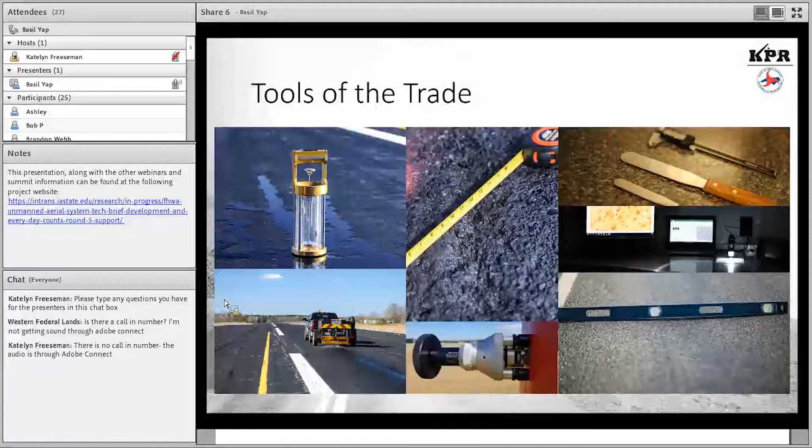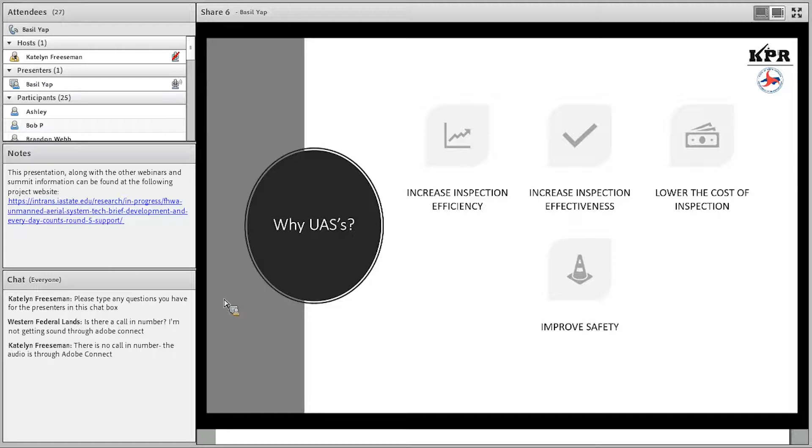So as highway professionals, we've got a lot of different tools. And all of these technologies require training and they require practice to implement, but each one of them enhances what we do, allows us to provide a better level of service, and also it usually helps us do things a little bit more efficiently. So something Katelyn touched on a little bit, why do we want UASs in our arsenal? Increase inspection efficiency, increase effectiveness, lower the cost, and one of the big ones we are seeing more and more is improving safety.

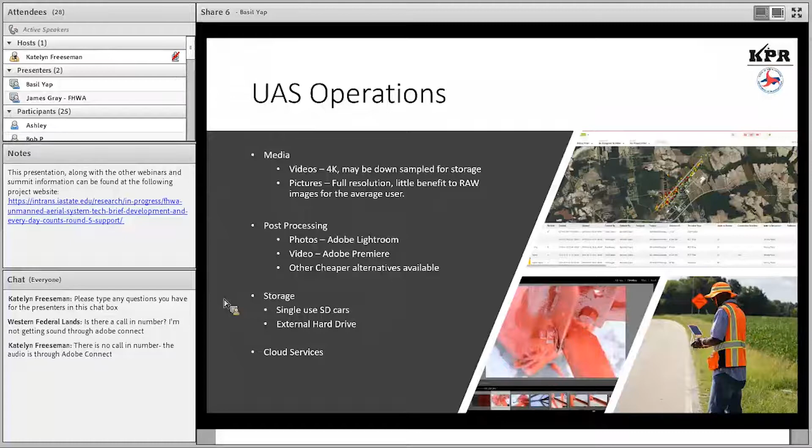For my team, and this is pretty common across North Carolina, we generally do operations in a two-man team. We have airband radios, we have all the VFR maps, and all the safety gear you'd have on a regular construction site. In terms of data, there's a lot of different things that we do. Most of the platforms we have 4K video capabilities, and they also do high-resolution photos. Honestly, there's really no good answer to which is better. Each inspection type, each inspector may prefer one or the other, and it's very good sometimes to be able to have both at your disposal.

So a couple of features that we look for, and this is an ever-changing field here. Sensor size, and that's the actual sensor of the UAV, not necessarily the megapixels. Obstacle avoidance. Wide-angle lenses are really good for those close-up inspections and getting perspective. Adjustable focal lengths. This is something that's becoming a little bit cheaper to find on UAVs, and this allows us to zoom in and see things in greater detail.

I've said battery time, battery life, battery time. I call it battery time because the size of the battery is irrelevant. It's how long the UAV will fly. And depending on your mission, you may need really extended flight times. A top-mounted camera, something we don't think about a lot. We need to be able to see up if we're underneath something. And then thermal cameras, which are coming down in price every day, can be quite useful for a lot of applications.

Just a quick note on the resolution versus sensor size, something that often gets overlooked. A sensor that is bigger with the same megapixels as a sensor that's smaller is likely more complex. It's going to have greater detail, greater definition. So if you're out shopping for a UAV, don't necessarily look at 20 megapixels versus 22 megapixels. Look at the details of the sensor, and you may find that you'll find more usable data.

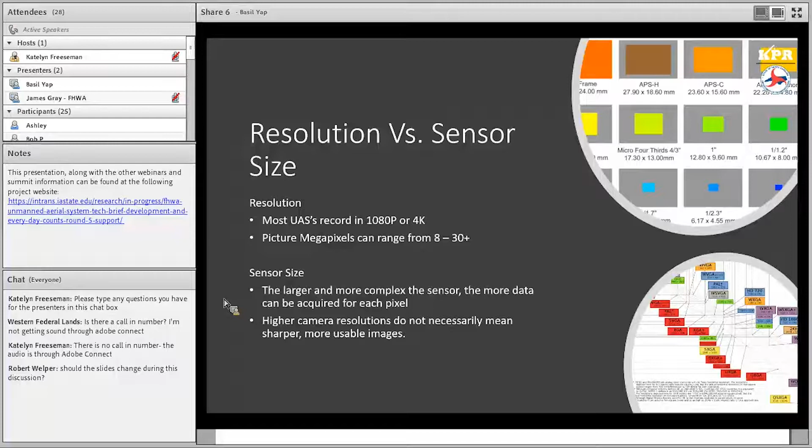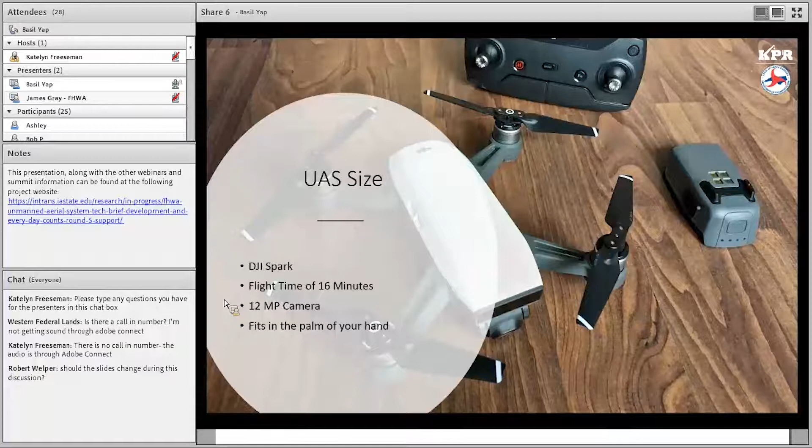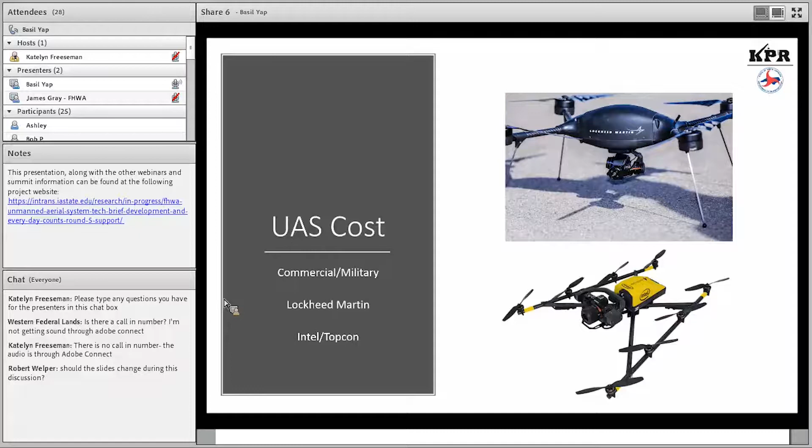Size here, this is a DJI Spark. Fits in the palm of your hand. It's about 400 bucks. This is probably the low end of what I see somebody trying to do anything with. The high end is things like the Lockheed Martin. Current price, I'm not sure. Last time I was quoted around 40,000 bucks. The Intel Topcon model there with the camera, probably going to look at about 25 grand. And these are with base model sensors. This isn't thermal or anything special.

Most of the folks that I run into in North Carolina doing this work have a UAV within the $1,000 to $10,000 range. A couple of popular ones there, the Yuneec and the DJI Inspire. A couple of other smaller popular ones are the DJI Phantom and the Mavic. And less popular, but definitely worth a mention, the Parrot and Autel UAVs. Parrot is one of the few companies that is not a Chinese-based company. For some folks, that makes a big deal. Autel is a Chinese-based parent company, but they are based out of Washington State for their U.S. operations.

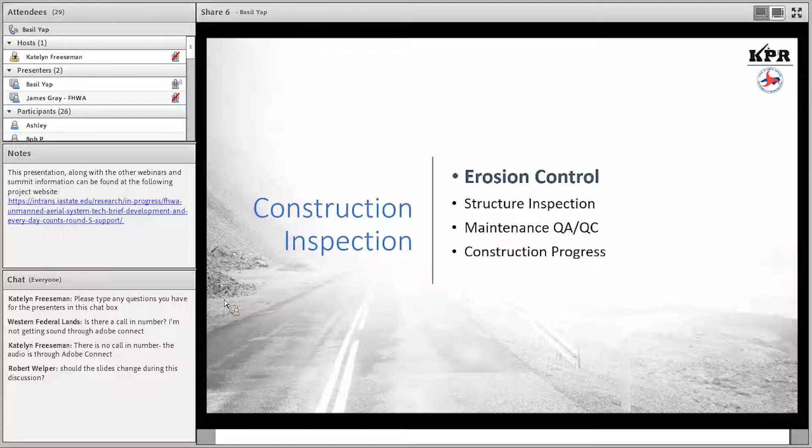We'll jump right in here to construction inspection. I'll let Basil take over. So we have it kind of split into 4 different sections here that we'll go through. And the first thing we'll look at is how we can use drones for erosion control. It's one of the use cases that we currently have NCDOT employees using drones to help monitor our erosion control measures on job sites, or really any other stormwater ponds that we have.

And it's important. This is really a kind of a use case that if you're just getting started using a drone within your civil engineering consulting firm or your Department of Transportation, with some off the shelf drones as well as some straightforward training, you could dive in and start using this.

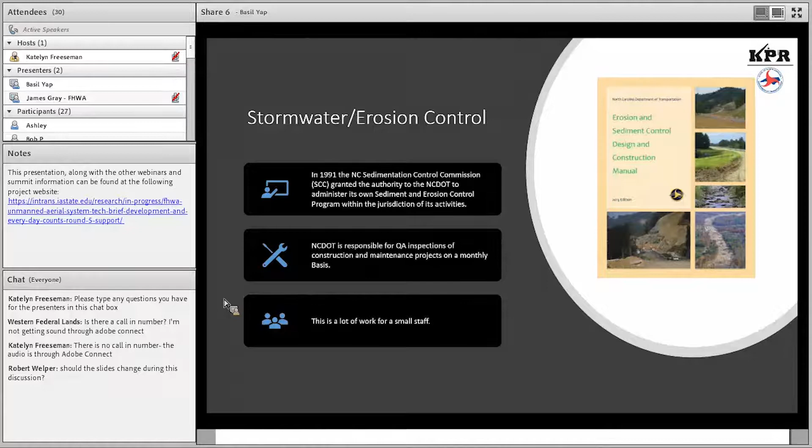So relatively uncomplicated. But we do obviously take stormwater and erosion control very seriously here in the state. Before this role, I worked in a residence office and oversaw a lot of construction sites. And certainly each day we're making sure that the erosion control measures were holding up as they were designed, especially during the afternoon showers that we often get here in North Carolina and the southeastern part of the state.

So the erosion control measures are permitted by the NCDOT, and so we just want to make sure that a contractor who has put those in place has properly placed them, and then we can document them. And they're of course maintained over the life of the project, which could go anywhere from one summer to multiple years. And so within North Carolina DOT, our roadside environmental office is going to be looking at those, as well as our division construction office.

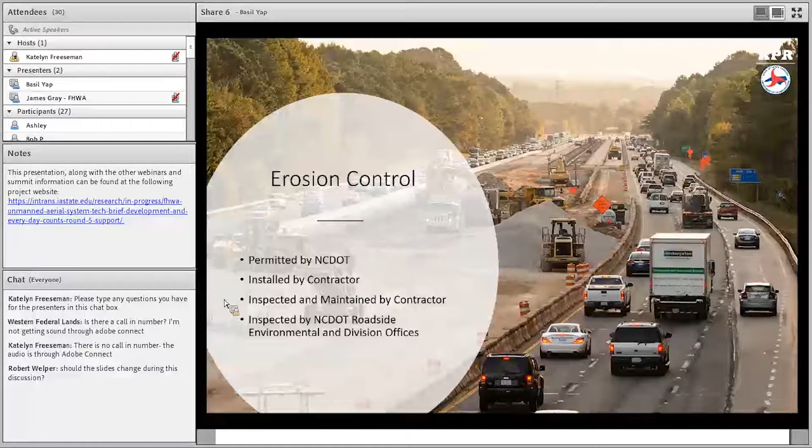Now, what drone will we use for this, and what are some of the key components? As mentioned before, a wide-angle lens is going to be very helpful. Battery time, and then obstacle avoidance. You're going to be flying, of course, near vegetation often, at least that's been the case in North Carolina, and you'll see that in our videos coming up.

The use of drones for this, we're trying to increase productivity and increase inspection quality. So how do we increase productivity? Well, we're able to use drones to access an entire job site much quicker than by foot, or if it's after a storm, we're able to access that without walking through mud or getting stuck. So we can quickly scan long distances of silt fence and document that either through video or photo, and keep it on file.

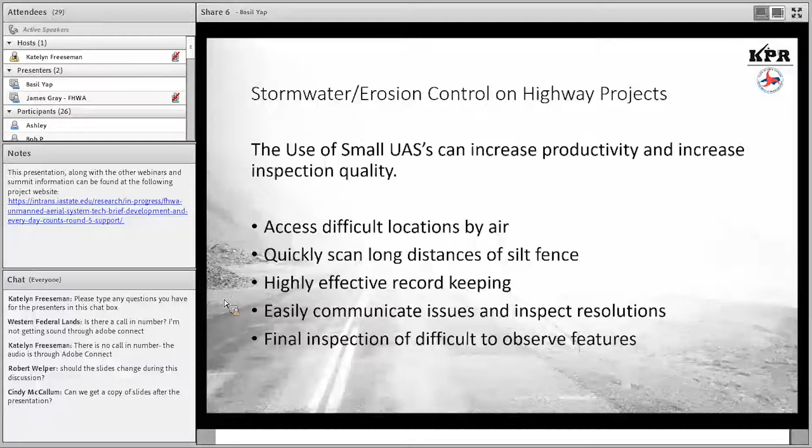And of course, once you find an issue, it's very easy to take a photo and quickly send an email saying, please address this. And again, while we can do that from the ground, often with a cell phone, it's really covering a large distance quickly. And then once there's a storm event, if we're hindered, we can use a drone to access. So a variety of different inspection needs here: silt fence, BMP features, retention facilities, and then of course the permanent stormwater management once that's installed and the road is back open.

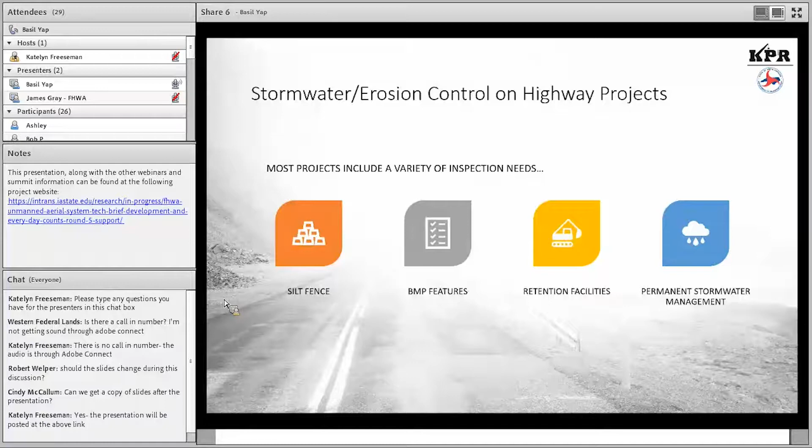So looking at silt fence, this probably is pretty familiar to a lot of you on the specifications on most job sites. We're looking, again, at a large area. We're able to quickly document, is this silt fence installed properly? Is it holding up? Has a tree branch fallen over it? Just ensuring the quality of the product that's in place. So here's a photo of some silt fence. This next one is a video.

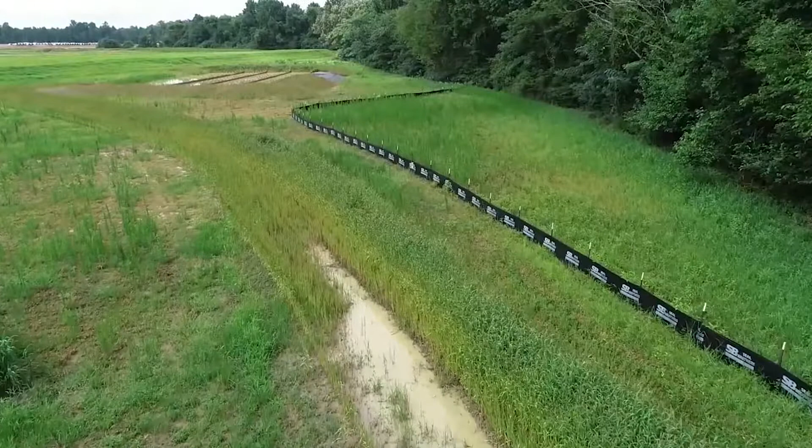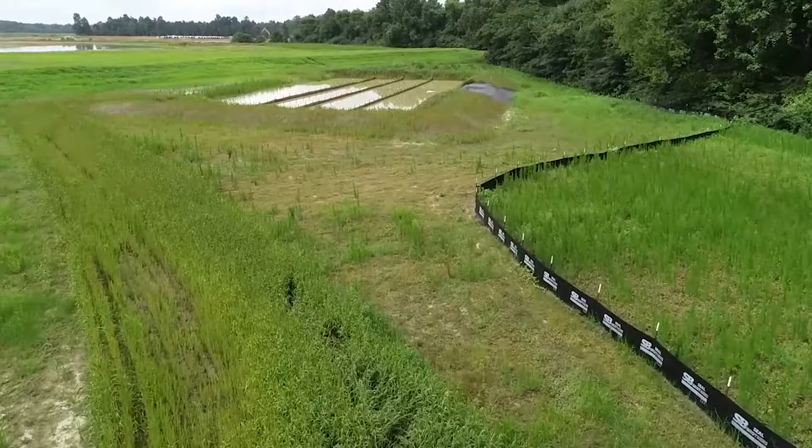One of the conversations Paul and I were having before this, while I was watching this video, I was saying, well, I would simply take a photo versus taking a video of this entire thing. And Paul's comment was, taking a video captures multiple perspectives of the same location, and that's quite true. So you can see some vegetation hanging over here.

This is why it's important to have some obstacle avoidance built into your drone. Of course, as a drone pilot, you're responsible for not running into things like trees. But the obstacle avoidance certainly is gonna help you gauge the distance you are from that particular obstacle.

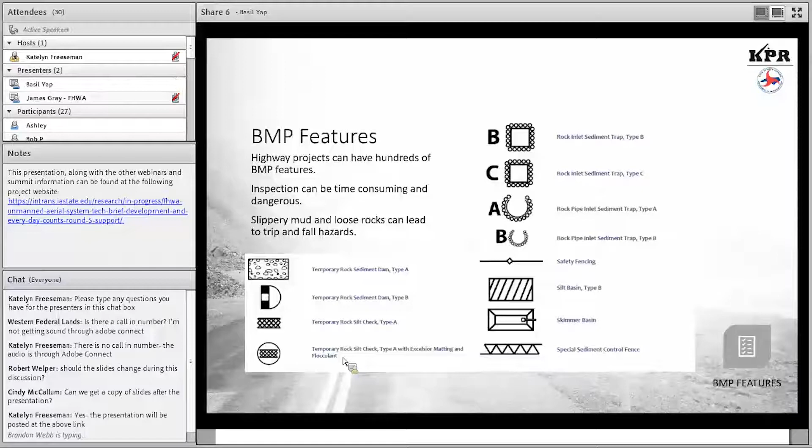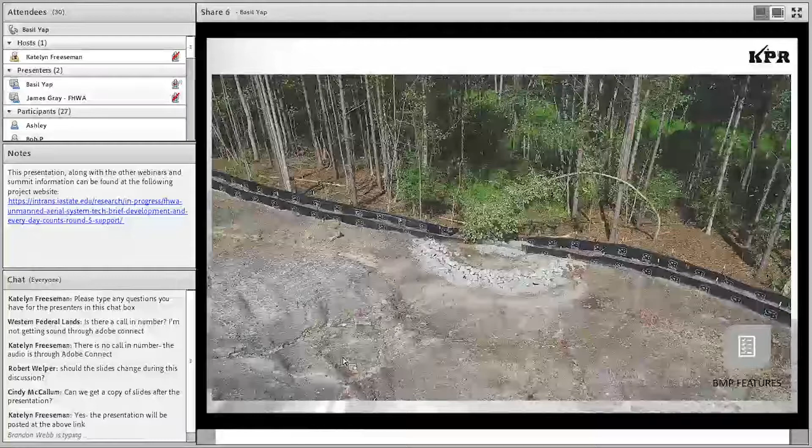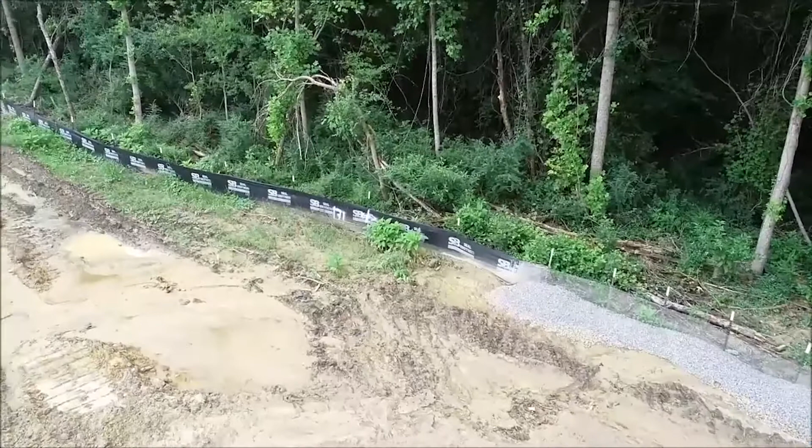So again, for those that are out in the field, you're probably very familiar with BMP features, common things you'll see on your construction plans. And so these are just some of the things you're going to be looking for. Here's a photo again. We can see potentially this is not holding up. Obviously, the tree branch has fallen over it here. But the area around it that's muddy, we can quickly get out and document it. Looks like we've got some water leaving the site here. These are from North Carolina DOT jobs that we have, so some of the uses that we already have in place now.

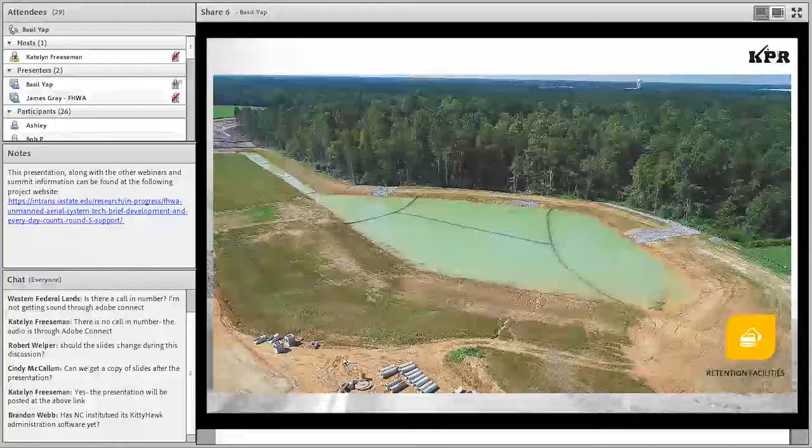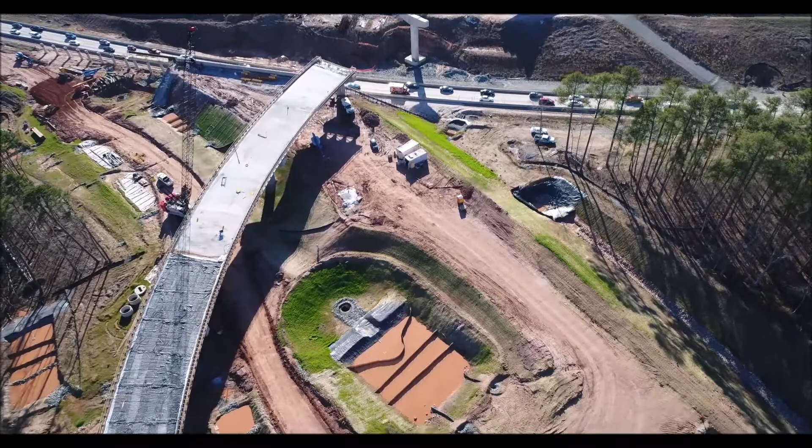Again, retention facilities, making sure that the sediment is settling, then draining the water out. So we've set it up on a schedule where we've documented these, flown them once a month, and then after a rain event, we'll fly them as well. This is a video here where you can see a retention pond, as well as quite a few different measures in place that we could inspect within this video or document. This is after a storm event.

So then once we have our permanent stormwater devices in place, say during the life of the project, before the pipe gets covered up and we're flying these job sites routinely, we're able to capture which catch basins are in based on what date the photo or the video was taken. If there's pipe on site, you can count the pipe, or you can see what pipe has been installed. And then, if it hasn't been covered up, again, you just have a documentation of that in place.

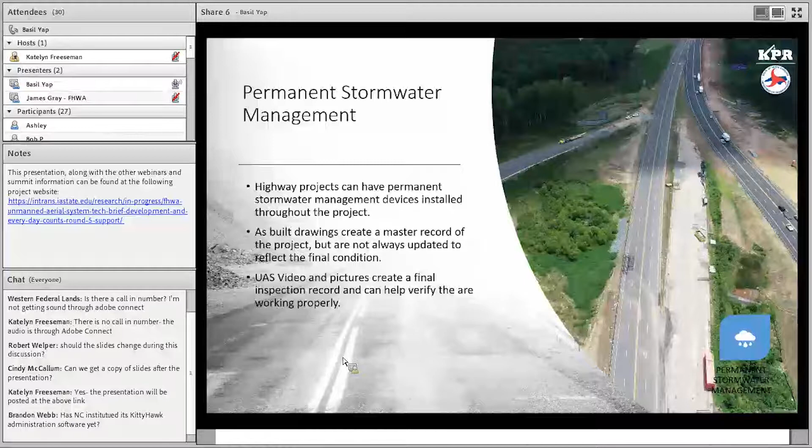And if you create an ortho photo, you can have a document that you can overlay over your plans, and that'll help with your as-built drawings as well. So this is actually documenting a residential subdivision, where we were going to then take over the road. After it was installed, the road was in place, the DOT would take over this right-of-way here and maintenance. So just documenting it.

All right. So another use. I know there's going to be a specific webinar, or there was a specific focus mentioned earlier, around structural inspection. What we're talking about here is within construction during the life of the project, not for maintenance. Some great uses around maintenance, but that'll probably be covered in a different webinar. Again, some key features you want to see in your drone. Sensor size is going to be key here, because the ability to capture high resolution, good quality images will be very helpful. Obstacle avoidance, again, if you're flying near an object or under a bridge.

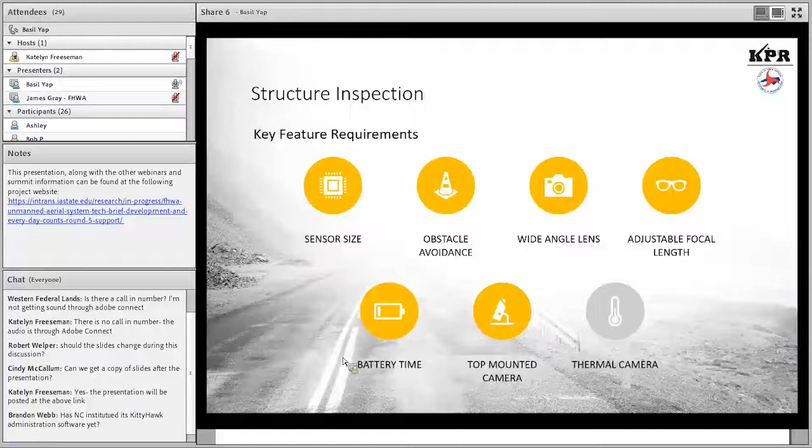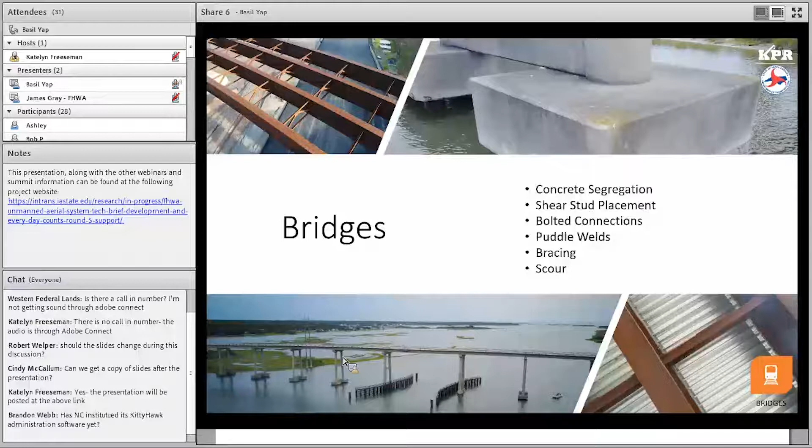So we'll just dive right in here. We're going to cover a couple things: bridges, towers, and other vertical construction, for example, the rest stops that we help build within our state. So we'll talk bridges, looking at quite a few different things: concrete segregation, shear stud placement, bolted connections, puddle welds, bracing, and then scouring around the bridge as well.

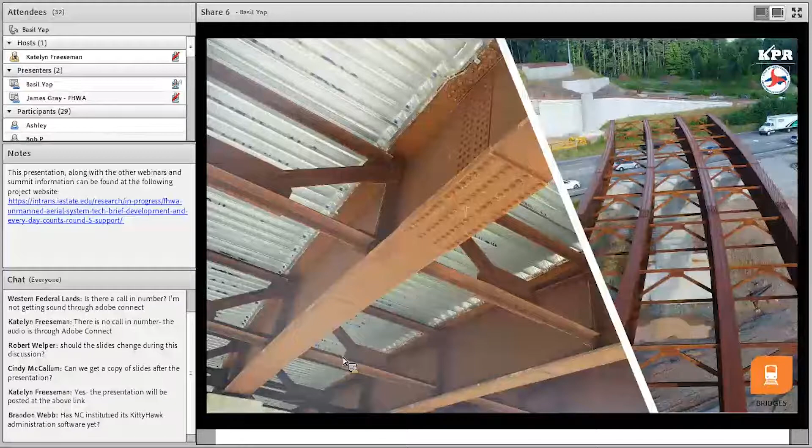Or if we were out there with the structural engineers, we could live stream as we were looking at these particular joists, and instead of getting a cherry picker up there to take a look at it, we could use the drone, essentially cover more area quicker, reducing the cost of getting that additional equipment out in the field.

This is a video of a bridge. This is NC-12. A hurricane came through here a couple of years ago and washed out the road. So they set up this temporary bridge, which you see in place, while they were building a bridge to ensure there was no future washout. This bridge is now open. But again, NC-12 on our coast. So this is during the construction process.

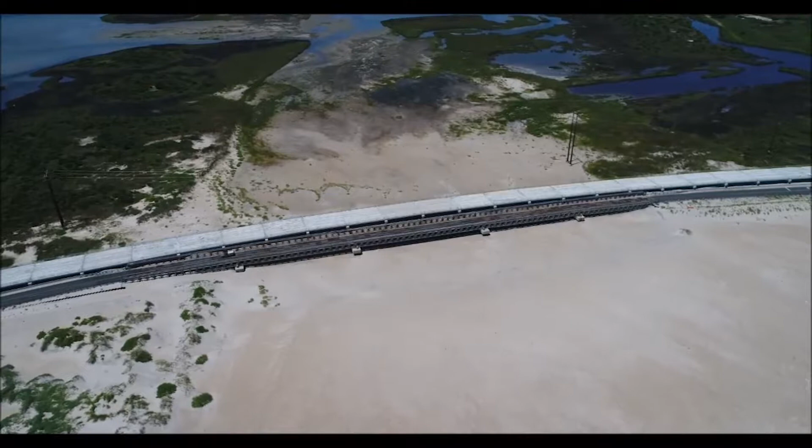It's not just internal folks that are looking at these videos. We're also sharing these externally as well, with our external partners, whether it's tourism or others, just so they're updated on the progress of the project, because NC-12 is on the Outer Banks. A lot of money goes through this area, and then with the public that lives on the Outer Banks as well. So it's a great tool to keep them updated.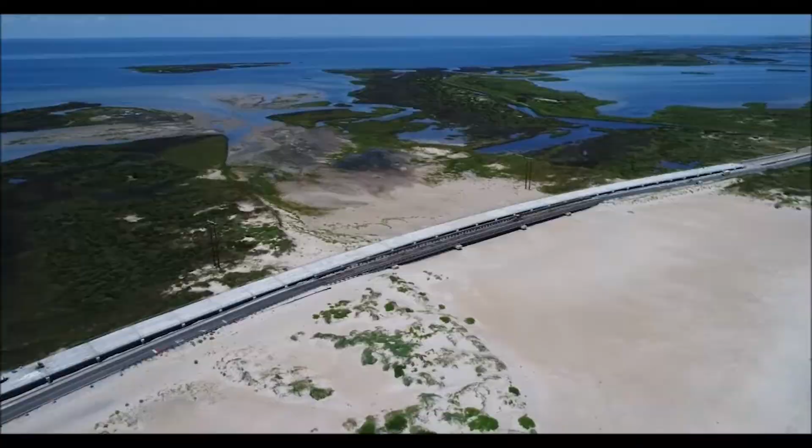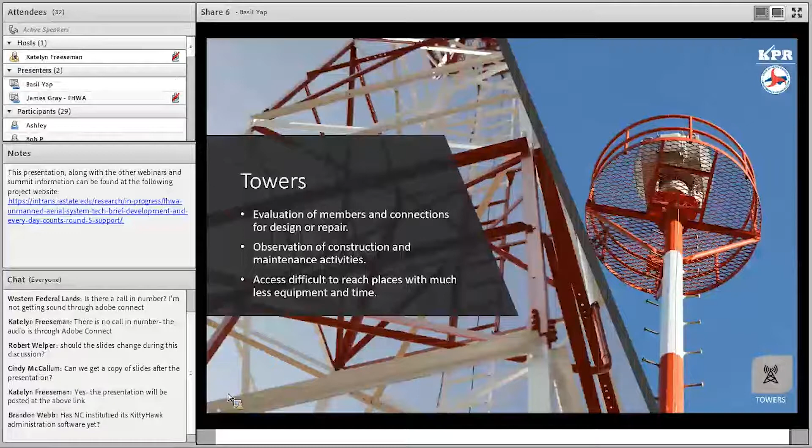So we'll jump into towers here. We've done quite a few different towers. These are around our airports, the beacon lights, and this could be duplicated into high mast towers and overhead signs, which we've also done testing on using zoom cameras. So we'll go over a couple of these to get the ideas flowing around how you can use this for tower inspection. Similar to other structures, we're looking at the connections. That's where your failure points often are.

Whether you're on the coast or inland, over time you're looking at coating conditions. How's it holding up before you want to have someone climb up some of these towers? You want to make sure the connections are not rusted out, so that the person climbing doesn't find out that it's rusted out. So again, we talked about enhancing safety. Before we would paint these, we use the drone to do a quick inspection. So this is a beacon light at an airport here.

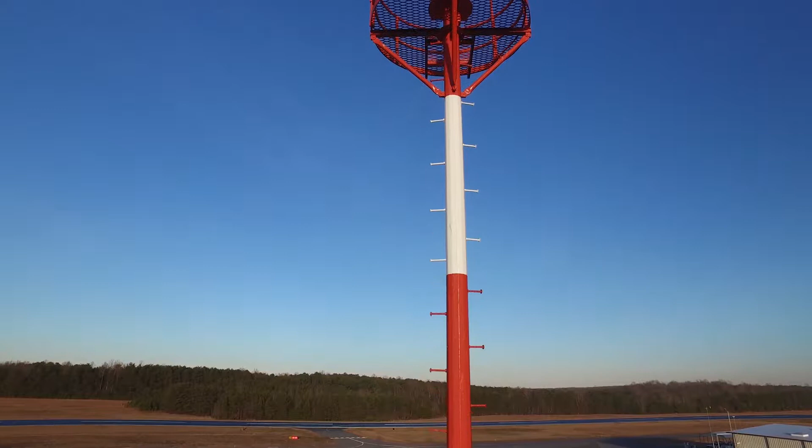If you're flying at an airport, there are precautions that you would need to have in place. This is a general aviation airport. And so you would just want to make sure you're coordinating with the airport manager so that they're aware you're flying. And of course, obviously, we're very close to this tower here while we're flying, but you wouldn't want to be flying over a runway without monitoring traffic.

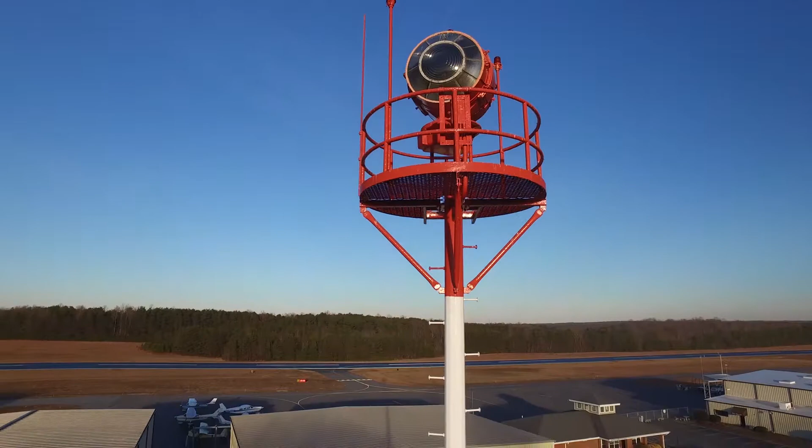Paul mentioned earlier airband radio. That's just having a radio that has the same frequency the pilots are flying, so that you can understand when they would be flying in. Helicopter traffic often doesn't use the same kind of procedures flying in on the runway, so being able to use that airband radio to monitor air traffic, and that'll be something you would learn as you get your license, your Part 107 license, to be able to fly.

All right, again, then vertical construction. Not a lot of vertical construction that we do within North Carolina DOT, but again, as we think about construction broadly, there are some great use cases here as well. We've often used drones to fly within enclosed areas, so not just externally. When you're flying in enclosed areas, of course, you want to make sure you have the feature we mentioned earlier, obstacle avoidance, that'll help you, because often there's no GPS that really helps keep your drone in a stable position.

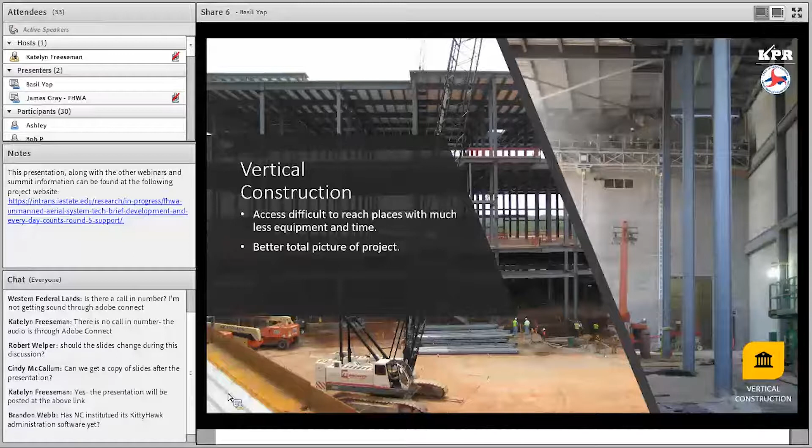But similar to bridges and towers, you're looking at connections and other things that would traditionally require a ladder or a cherry picker or some other device, a snooper truck, that could be cost prohibitive. And so you're able to reduce that cost. You're also able to not put people in danger and use a drone to do those inspections. And we also would use it to just monitor progress.

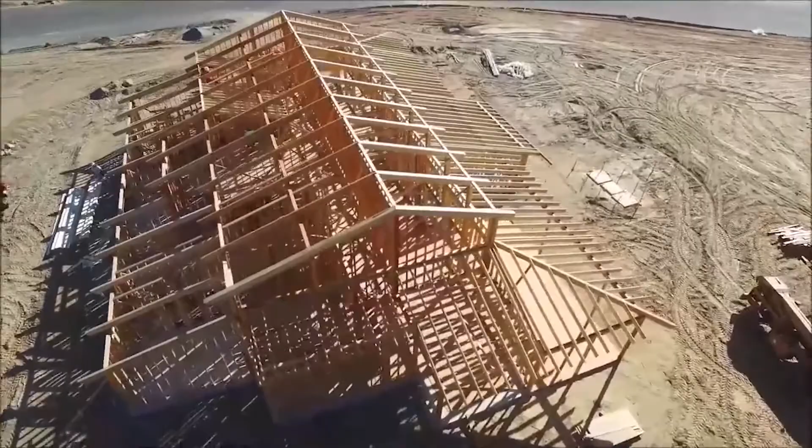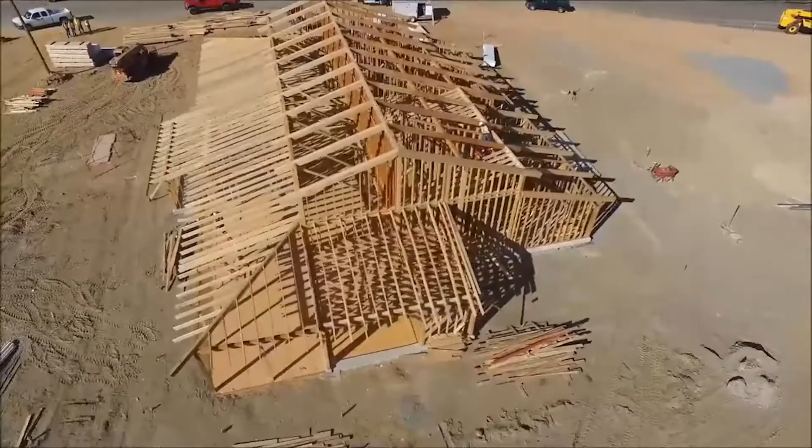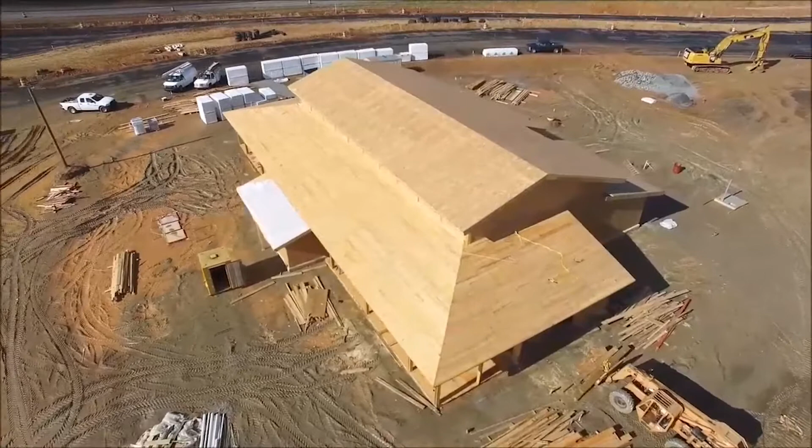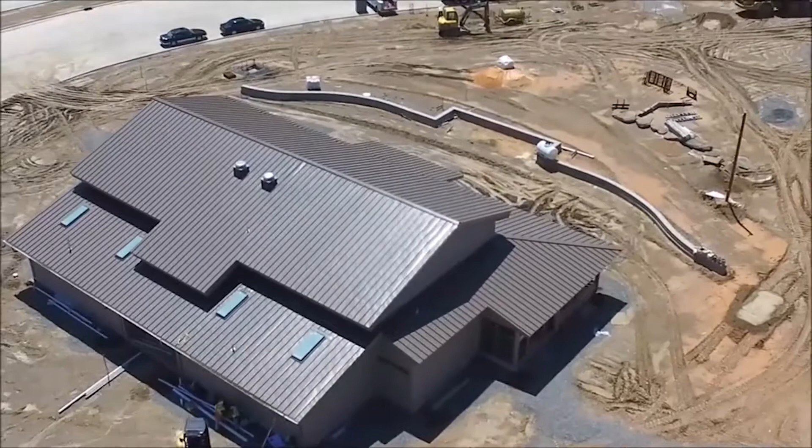So here's a rest stop in North Carolina, and so we would go out and fly this every so often, as you'll see it start to change here. Again, a great tool to kind of document. You could share this with external folks, but it's also a great document internally. You have timestamps, date, video or photos. So we'll just keep moving. Spoiler alert, it does get built and opened.

So, all right, we'll jump to the last two things we'll address here: maintenance and construction projects. A big part of DOT's budget is maintenance of roadways, airports, and other DOT property. When considering a UAV for this type of work, most often, again, that wide angle lens is helpful for looking at things in perspective. Adjustable focal length, again, we talked about that, trying to get close to objects without really getting close to them, probably a good feature to have. And the thermal camera is where this starts to really be useful in our experience, looking at surface treatments and asphalt.

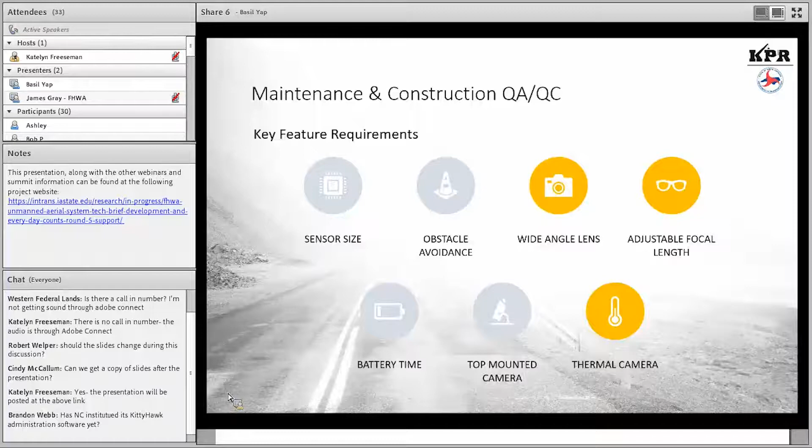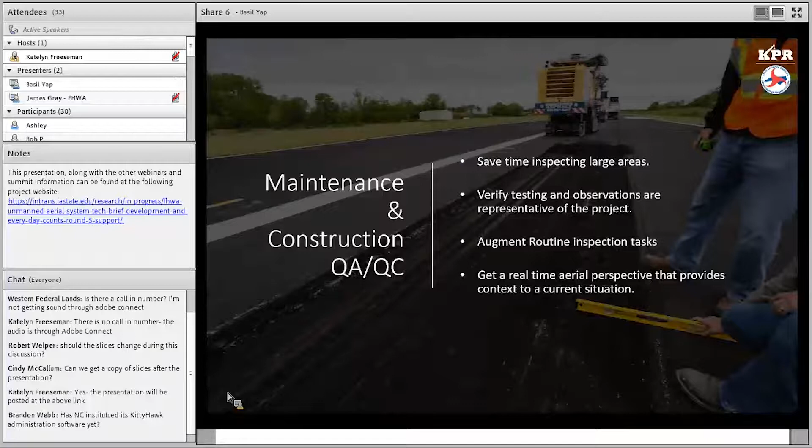Again, the same thing we find here with any of the other parts of construction inspection. We're looking to save time, save money, and create a better product. Right now, we're doing a few areas in North Carolina: surface treatment inspections, some thermal imaging special cases, pavement marking inspection. We're also doing inspection training, and we're also collecting data for safety assessments for the residents.

On surface treatments, what we can do is look for consistency in the application. Sometimes surface treatments are on a single lane road, sometimes they're on a larger multi-lane road, or even on an airport. It can become difficult to see down on top of these areas without being in the middle of the construction or having to walk through or ride on a piece of equipment. We can also look at things like traffic control and other things that are going on around the surface treatments.

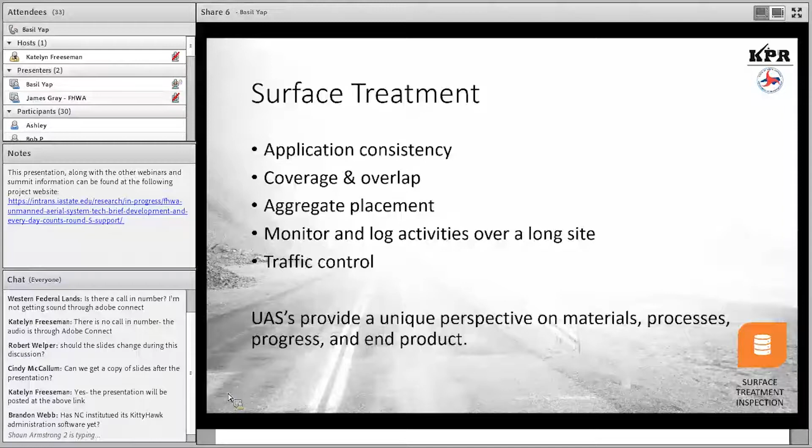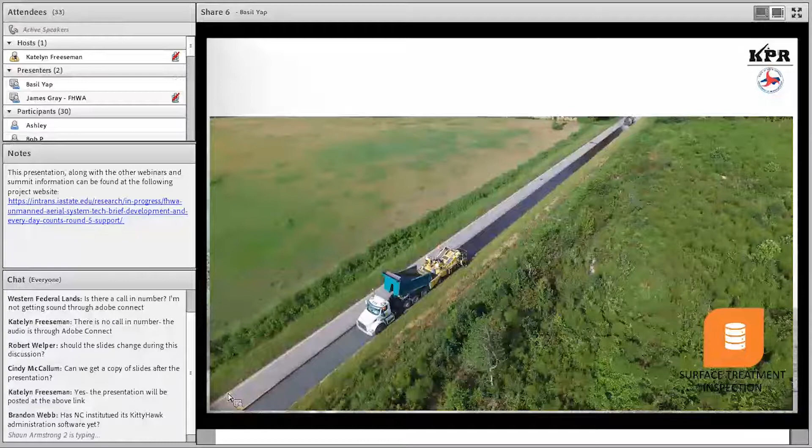This is a chip seal here in North Carolina, a pretty common sight through the construction season. These things move fast. Most of you probably have experience with them. It is an operation that is hard to keep tabs on, and everything needs to be done properly, or you start to get a pretty poor job and loss of aggregate, bleeding, all kinds of other issues that make it almost not worth doing the maintenance at all.

Again, another picture there of the chip seal. On the right side, we can see a little closer picture of the action. And in this photo, we can see a couple issues.

So this road is open to the public. We've got a truck who's parking in the lane, which is going to make it difficult for cars to pass safely by. We've got a hopper that's not full, so the hopper's not full, the conveyor belt's not full, the box is not full, and now we've got a section in the middle of the road that's not going to have enough aggregate on it.

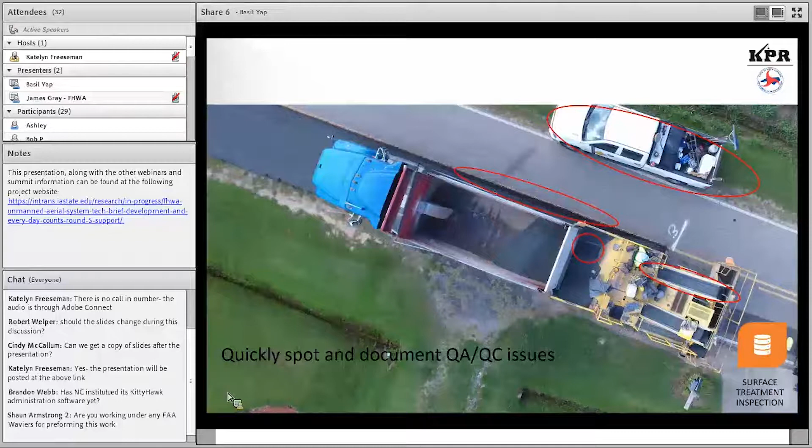Thermal imaging - caution you a little bit on thermal cameras. They're kind of in their infancy for UAVs. The quality of image you get, the price is very, very high right now. We hope that's going to come down. It looks like there's been a lot of movement downward in the pricing for thermal cameras. But before you go out and spend 50 grand on the best thermal camera, realize that camera's probably going to be 20 grand next year.

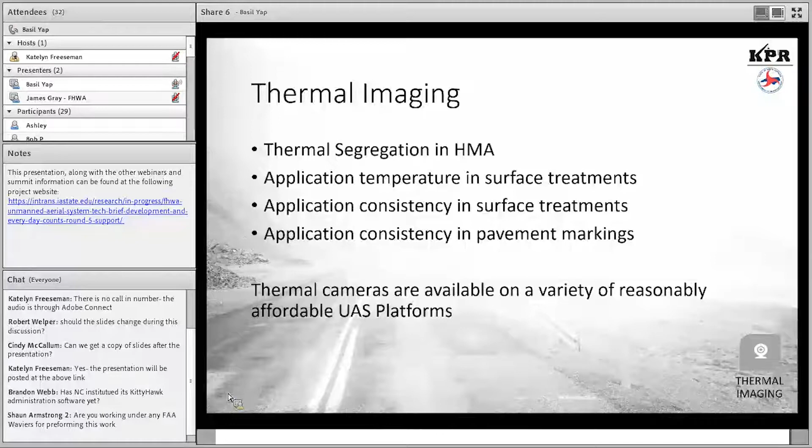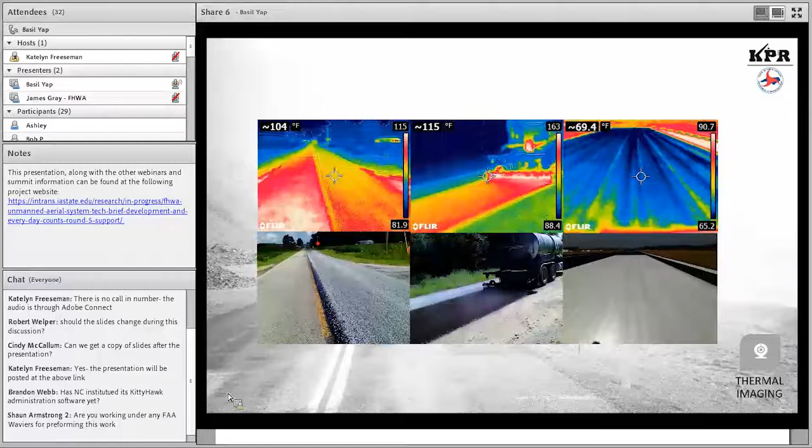So some of the things that we found helpful looking at that thermal segregation in a couple of different areas: we've got chip seals and surface treatments, and then also another one we spent a lot of money on. We've got 72 publicly maintained airports in the state, and we spent a lot of money on airport paint. We can see the differences in the paint thicknesses because we have two dissimilar materials at two different temperatures, and as they go down, they're going to come to the same temperature. As we see those differences, we know we've got a difference in application rate.

Pavement markings, another one that kind of gets overlooked. My crew does a number of pavement marking testing things - reflectivity, material testing, and all that type of stuff. But it's really a pretty small group of people in our state that do it, partially because it's something that's done at the end of the project when we're trying to rush out. Sometimes having a UAV to fly over the project, you can get a little different perspective and make sure things are put down right.

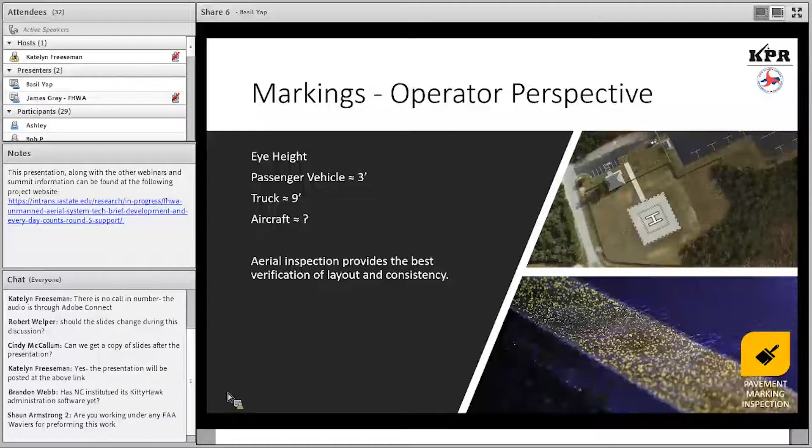This is really important on the airports that we do, because the perspective of the pilot is not sitting on the ground. A couple images here from recent airport projects, and here's some video of some markings. Going down here, we can see the application process. So all this paint, if you look across there, it's wet, and we've got moving equipment. Sometimes it's difficult to look at things closely without being in the middle of it, and we also get a little bit different perspective here.

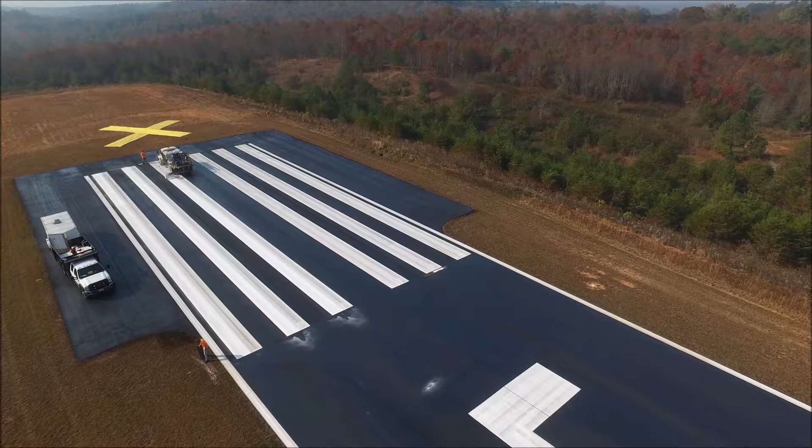There's a finished paint job. And this is another use case on the highway side for markings.

We're getting a lot more of these unconventional intersections in North Carolina. I know they're popping up in other states as well. Something we can do is verify that our marking layout on these unconventional intersections are functioning as intended. As a PE, I hate to not fully vet every new technology, whether that's an intersection or a new geotextile or something else on the market, before it's turned over 100% to the public. So with this type of record, we can make sure that the cars are understanding where they're going. Do we need to add additional markings? Are the markings we have legible, and all the rest?

You could also use that when we're looking at intersections like that to monitor, or share with the public. We found those are useful so that the public is aware of what this new intersection that they've never heard of is coming to their community. So you can show videos like that - helpful.

One of the areas that we're really starting to pick up traction on is inspection training. We've all probably watched a video produced by, most of the time, private entities that are trying to do some training. DOTs in-house have done some too - I'm familiar with a couple different DOTs - but the UAV allows us to create very tailored, very specific training videos and share those with our inspectors, and even share those with the contractors. The ultimate goal here is to improve the quality of what we're doing.

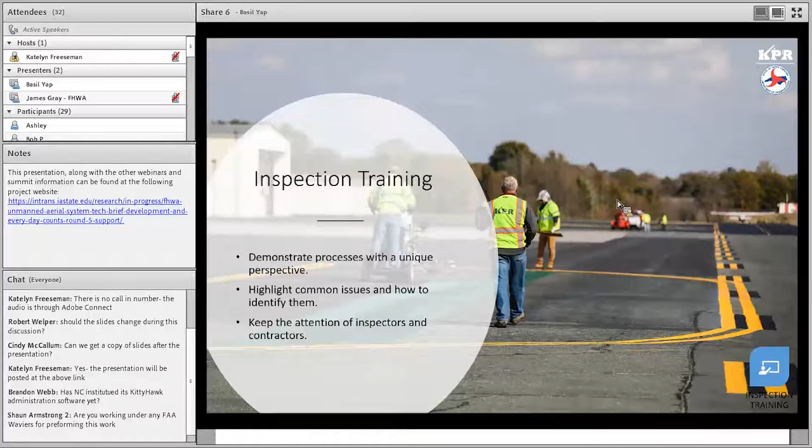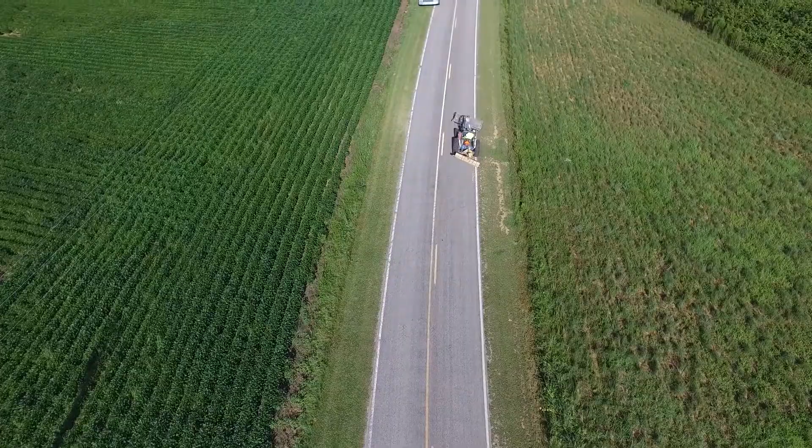So here is some B-roll from the training video that's being produced by one of the other units in DOT, and this is going to be used to train all of their chip seal inspectors. It seems like they try to combat it with getting in private parties, but the reality is that people that know how to do this inspection are retiring quicker than they can replace them, and the quality of the work is suffering as a result.

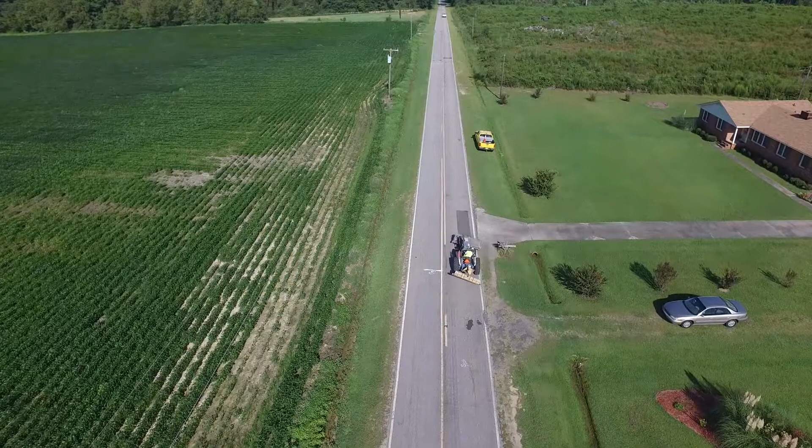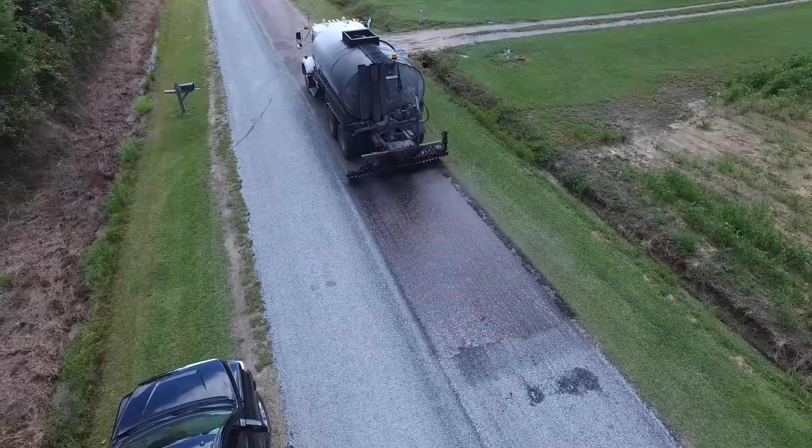So now we can train people in real time, basically collect the video one day, show them what went wrong, and the next day they can make adjustments. This provides a unique perspective we can't get from standing on the ground with a camera. It doesn't matter how nice the camera is, we can't see this in the same perspective.

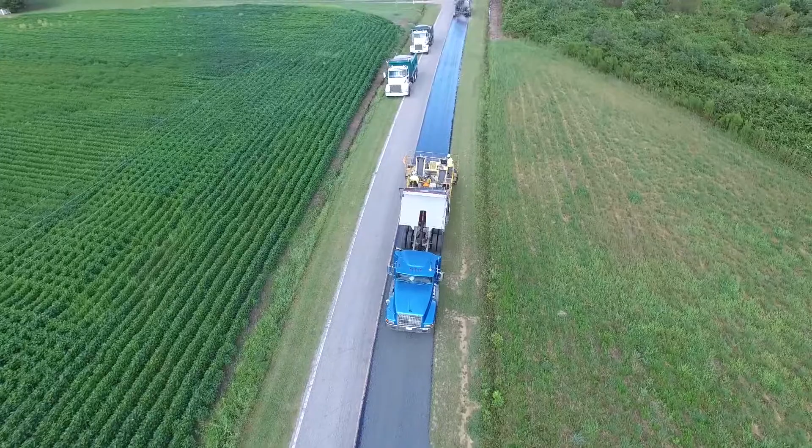A little bit more of the process here. There's a little bit more of that B-roll.

All right, job site safety. This is kind of a byproduct of the rest of the things we do, but it's also becoming a little bit more mainstream. We can document all kinds of safety issues.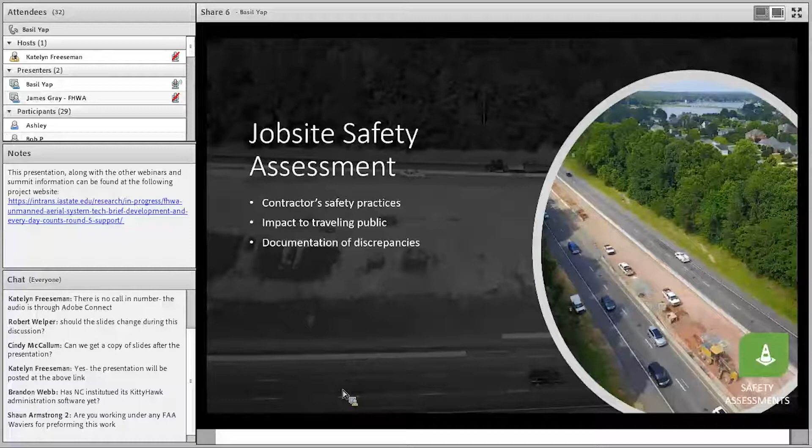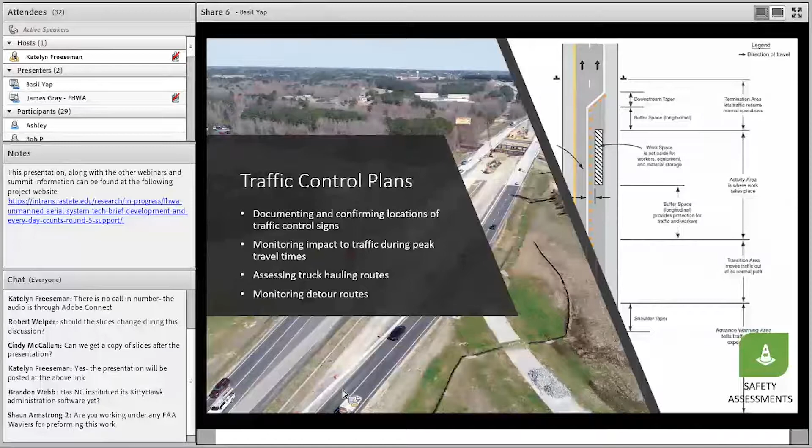One of the big ones is haul routes and safety of the actual lane shifts, the lane closures, all that. And very quickly we can document what's going right, what's going wrong. We can share it with the people that are in charge and say, hey look, we've got a hot spot here, we need to do something about it. And we can make quick changes that will probably ultimately save lives if we do not have traffic behaving erratically. Here's a picture of a bridge here that we did a safety assessment on.

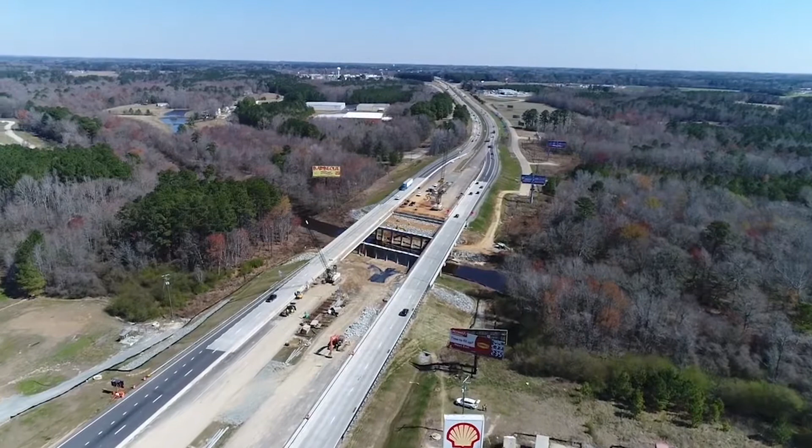Here's a little bit of video that goes with it. The primary goal of this one - we're not going to show you the worst ones out there, but the primary goal of this is to make sure that this lane shift is operating smoothly. I believe this is I-95, is that correct, Basil? And so we want to make sure that folks coming from New York and Miami aren't seeing something that they're not expecting, and we end up with a fatal truck accident or somebody making a last-minute irrational maneuver and creating a pileup that closes the interstate for half a day.

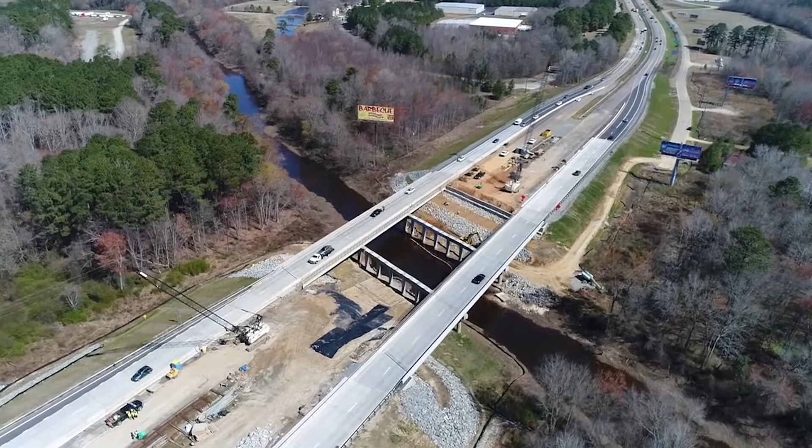Often when you have construction going on in the median, like in this particular case, you can see it's built and there's a lot of traffic on the median. And so if you're hauling in - Paul mentioned the haul routes, and that's where we've seen a lot of the traffic incidences, when we have slow moving trucks that are loaded up and now they're merging into traffic. And if traffic is at 55 miles an hour, do they have enough space to get up to speed, or do they cause an incident?

And sometimes the plans, they have the traffic control set up for the plans, but there needs to be some modification made. And so this is kind of a unique perspective. We've been called multiple times to respond to incidences like this, where we have to go out and document and monitor from the sky an area that is now of concern.

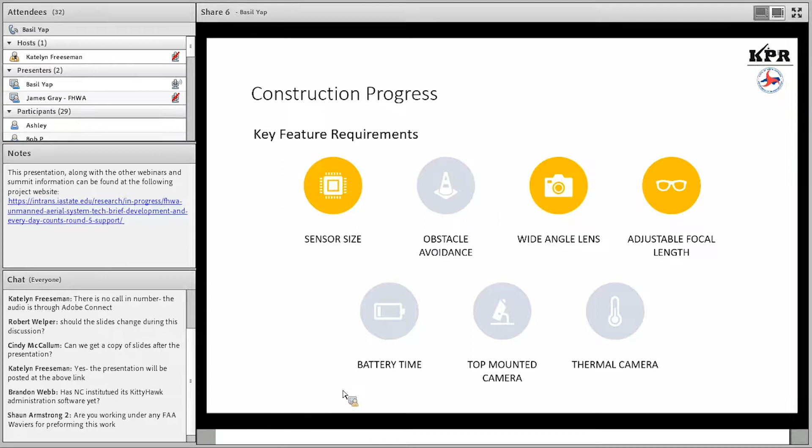So construction progress. Again, sensor size, wide angle lens, adjustable focal length - some of the key requirements that we're looking at here.

When we're looking at construction projects, as someone who is an inspector or an engineer over the project, you're administering funds, validating that the job site or the construction is progressing as scheduled. If there's any hiccups or milestones that are not met, you want to be able to document those. And you're verifying that the invoices that you're receiving and the material that's being billed is accurate. And so we're looking at how can we use a drone to help with that and monitor the construction progress.

I'll quickly address one of the questions that someone asked about - are there any FAA waivers that we are using to perform this work? We have a night waiver in place, which we do use occasionally at night, but most of the time we're flying during the day. Most of the time the folks are out there, but sometimes at night to monitor traffic. We've used that night waiver, and then during any kind of natural disaster response, like Hurricane Florence last year, we've been able to get waivers to fly beyond visual line of sight, etc., as needed for our mission.

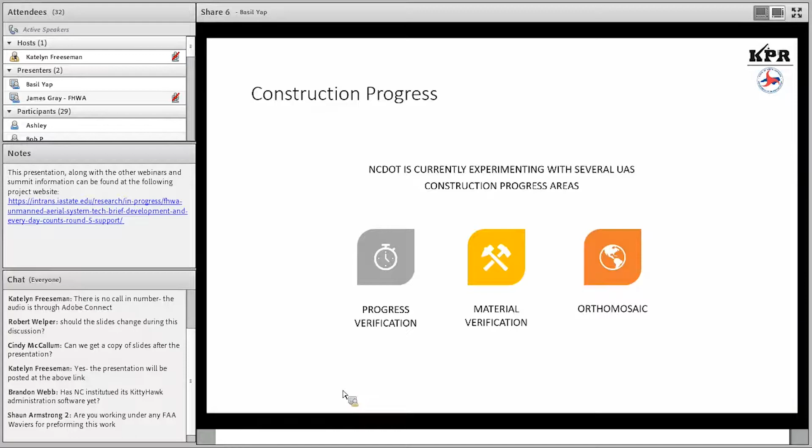The progress verification - again, a picture or video, if it gets to court, speaks volumes. So that's, again, a unique perspective. We've mentioned that multiple times here by using the drone to capture the progress.

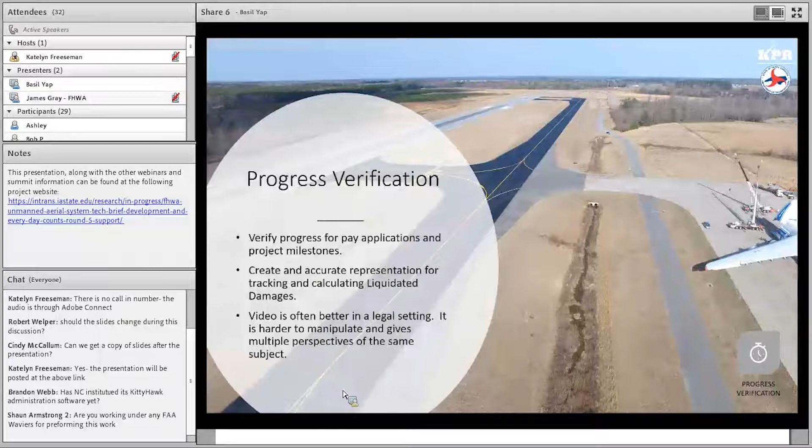Something that is a touchy subject is liquidated damages. Lots of contracts all over the state and the nation have them. Before you go to assess liquidated damages, it's really good to have both document proof and actual video from the UAVs, nice video and photo evidence. Because there's always an excuse why something's not done on time. If you have video showing, hey, we weren't working on a clear day, it's not a rain day, it's going to make the process a whole lot smoother.

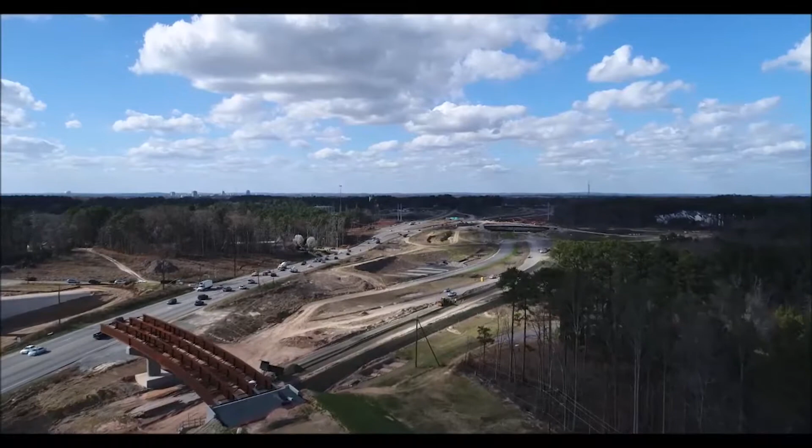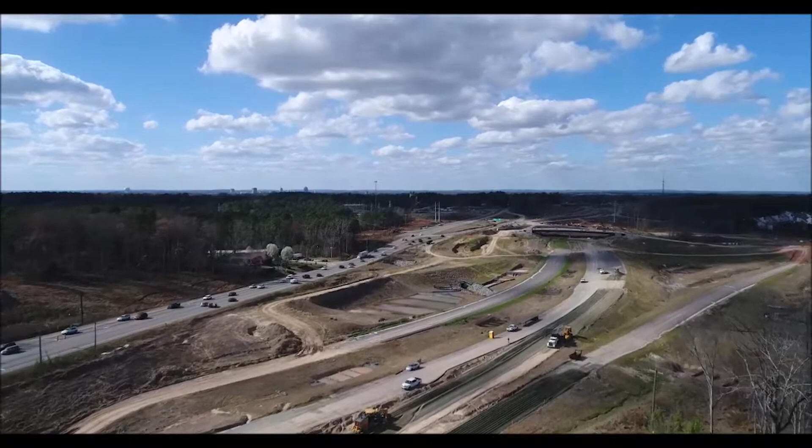Unfortunately, I've been through liquidated damages managing a couple different projects, though this was before we had the drone program up and running. This is a site that we often fly, one of multiple sites throughout the state, assessing the progress on this particular job site. You can see it helps verify if the project is progressing. And sharing it with your leadership, not just the division offices, but if things get elevated and you have a state representative or legislator calling asking about something, this also helps speak volumes or support your case.

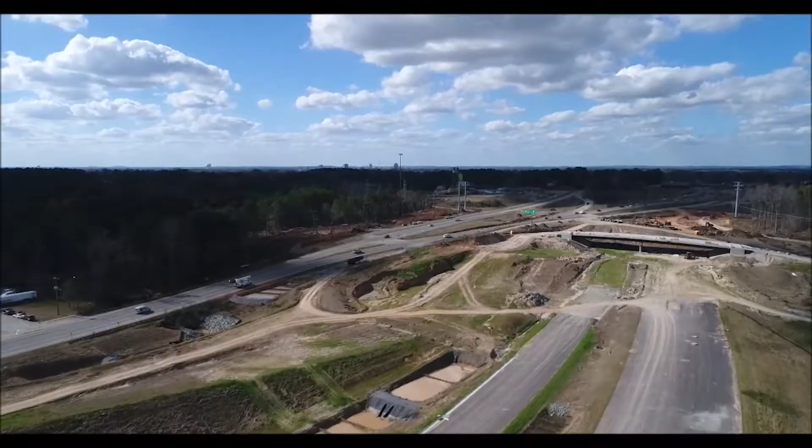Ortho mosaics will probably be covered in more detail in the surveying webinar, so we'll keep it high level. A lot of what we've shown up until this point is not an ortho mosaic. Ortho mosaics are multiple photos stitched together to create essentially a larger photo, like what you see on Google Maps, satellite photos or images taken from planes stitched together. A wider area can be geo-referenced, and with some measures in place for accuracy, you can take measurements from them. In this case we were using them just to document a job site.

With this ortho mosaic, not for a survey application but a construction inspection application, we can create a file that captures the entire site at a particular point in time. We can verify construction progress, see what materials are on site, and do a lot of different things with the mosaic, and they're pretty quick to get.

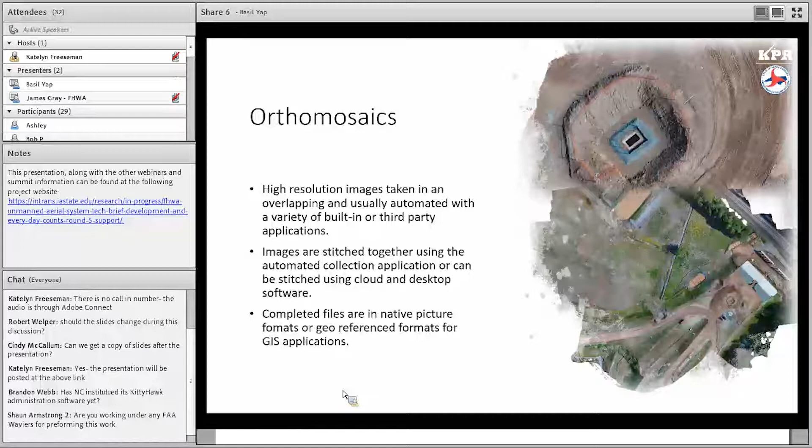The drone flies back and forth taking nadir photos, straight down, with overlap in your photos, about 80% overlap. So your photos overlap by 80%, and you'll have multiple points within each photo that line up, and that's how you create an ortho photo, stitching them together, which is what you see in the product at the bottom right-hand corner.

Great for as-builts, once a project's completed, documenting the entire site. We've also seen this in pre-construction, going out when they spray utilities. Utility folks come out, mark the ground, and that marking is easily visible from the drone. So if your ortho mosaic is to a certain accuracy standard, you can throw that into some plans and put the utility on your design plan as well. Material verification, too, as we mentioned earlier - a lot of data you can pull from these photos.

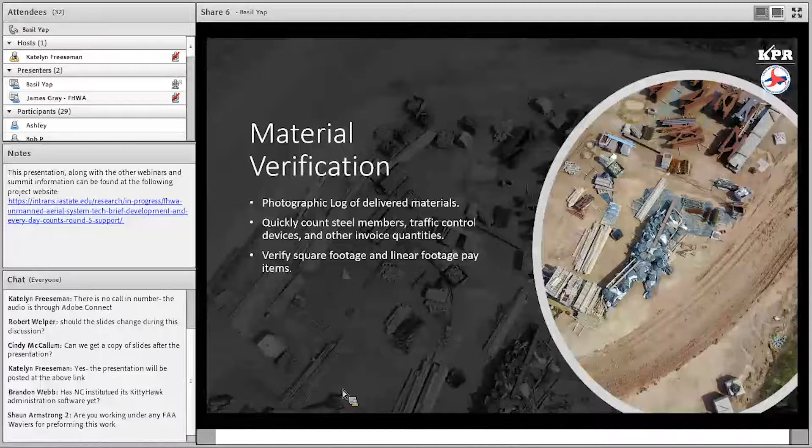So wrapping up here, I don't know how many folks in the audience already have the Part 107, but if you don't, it's really not a big deal to get it. There are a lot of guides out there. You probably don't even have to hire somebody to train you.

There's enough free literature. NCDOT even has a study guide for theirs that's very similar to the federal one. Go ahead and get that done. And I personally think you start with an affordable UAV, a UAS. Get it into the hands of yourself if you're an inspector, or your staff if they're inspecting, and let them start to determine how they're going to best use it. Let them augment their existing work.

It's kind of like the first time we got a digital camera on site. It changed things, but it wasn't something that had to come from top down. That's kind of the approach that Basil's group here inside of NCDOT is taking when they're trying to get these things into the field, into different divisions: provide the training they need, allow them to use them as best suits their needs. So

this next slide that we have here just illustrates there's lots of different rules out there. And just be aware of those. We don't need to dive into these, but they're constantly evolving and changing. And so once you become a pilot, you'll be aware of these rules, and it's always good to be aware of any changes that there are. There are certain limitations that are built in right now to protect, of course, aircraft flying in the sky, folks on the ground as this technology matures.

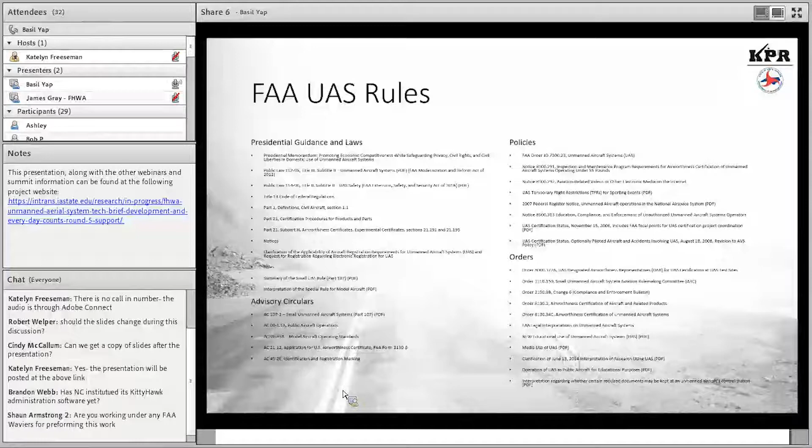So we'll jump into the questions. Just looking through the questions here, a gentleman, Brandon Webb, asked, has NC instituted its Kitty Hawk administration software yet? So what he's referring to there is Kitty Hawk, while also the location of the first powered flight by the Wright brothers in North Carolina, is also a software suite that helps with drone fleet management and mission management. So our North Carolina DOT UAS policy requires anyone who's flying drones for the DOT to turn in their hours, how many hours they've flown, locations, etc.

That helps us understand how many folks or how many missions we have going on, and where folks are flying, make sure it's done safely and, of course, legally. So we've talked with this particular company, Kitty Hawk. And so to answer your question, we have not instituted it yet. We're still going through

we actually just recently went through a wide variety of software privacy threshold analysis, which, if you guys are following, the Department of Homeland Security put a UAS industry alert out saying that there were some privacy concerns around Chinese manufactured drones. And so what we've done is we've gone back and done privacy analysis on all these different platforms. So we hope to have Kitty Hawk up and running soon.